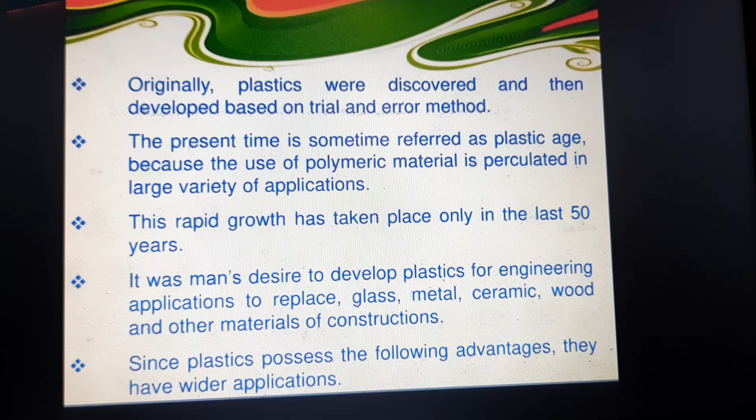Originally plastics were discovered and then developed based on the trial and error method. It was discovered by trial and error, but nowadays the whole world depends upon plastic. Second point, the present time is sometimes referred to as the plastic age because the use of polymeric material has percolated into a large variety of applications. So in all applications, plastic is present in all types of materials.

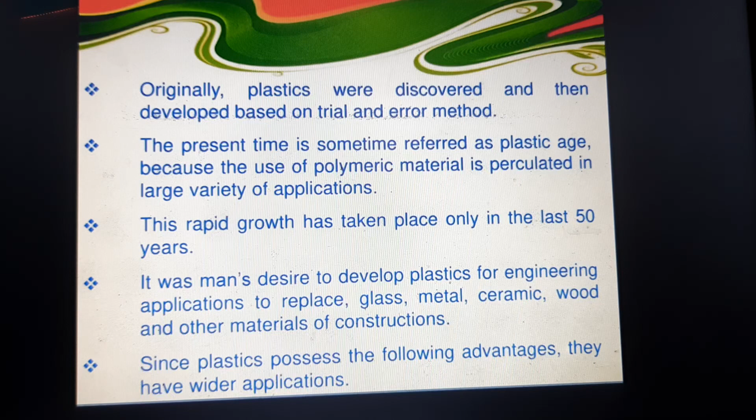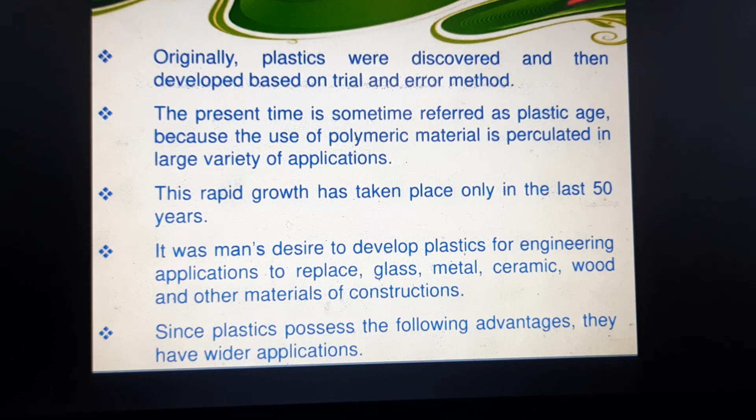Third, this rapid growth has taken place only in the last 50 years. So plastic has grown in the last 50 years in many places, all people are using it, and growth is driven by plastic. It was man's desire to develop plastics for engineering applications to replace glass, metal, ceramic, wood and other materials of construction. So plastics are desired everywhere.

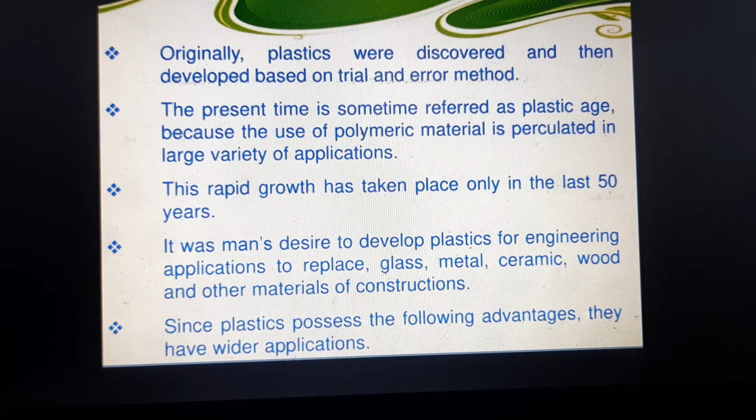Since plastics possess the following advantages, they have wider applications. Why do we like plastics? The advantages of plastic over other materials, compared with wood and metal, are why all people like plastic. That is what we discuss in this slide. Point number 1, they are light in weight. Second, they possess a low melting point.

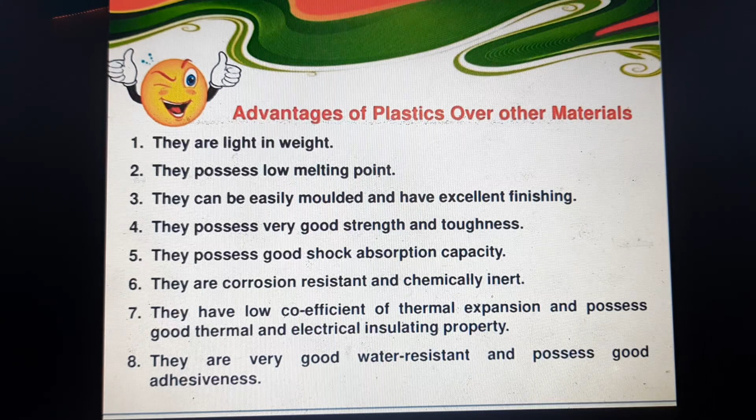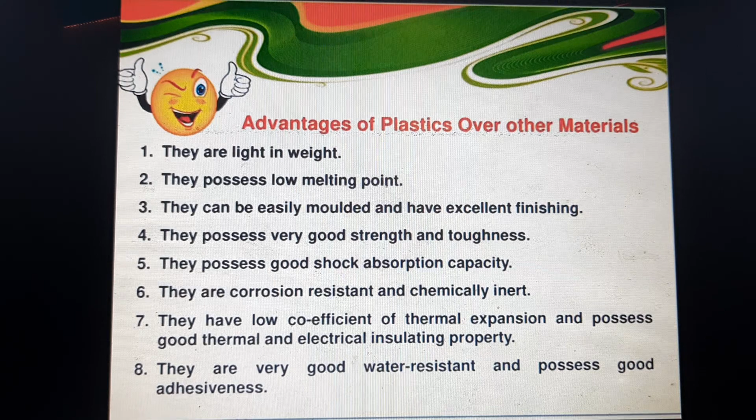Third, they can be easily molded and have excellent finishing. They possess very good strength and toughness. They possess good shock absorption capacity. They are corrosion resistant and chemically inert. They have a low coefficient of thermal expansion and possess good thermal and electrical insulating properties. They are very good water resistant and possess good adhesiveness.

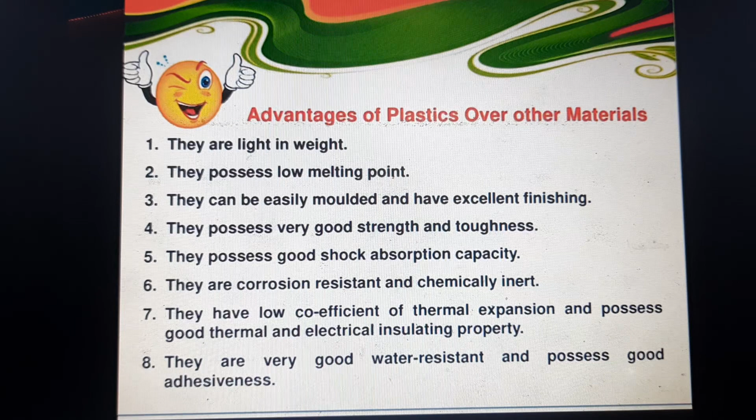So these are the properties we use in our homes. Light in weight, and the melting point is very low. At the same time, plastics give excellent finishing. In metal, the finishing is not as good. Compared with that, the plastics finishing is very good and nice. At the same time, plastics have good shock absorption capacity.

In old days, people used insulating tape as a precaution; if there was any damage in a wire, you could immediately use a plastic cover or polythene bag because plastics have good shock absorption capacity. So these are the very important advantages of plastics over other materials.

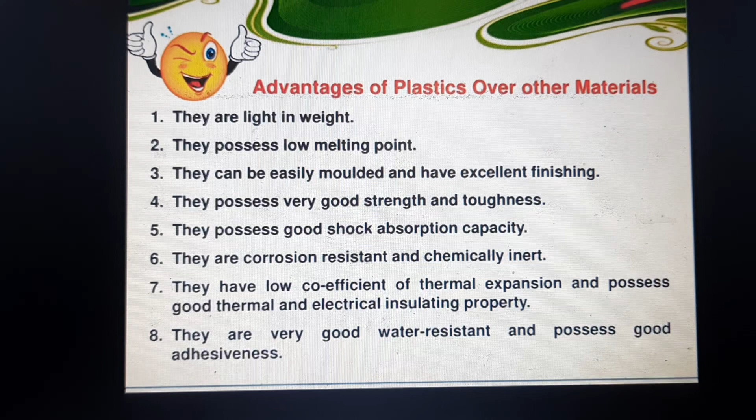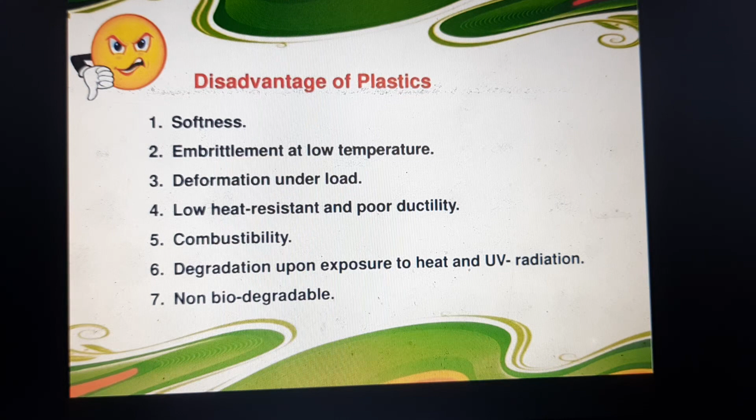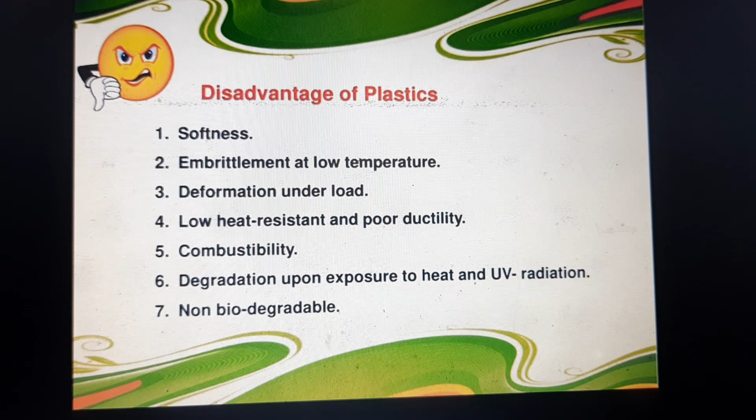Disadvantages of plastics: softness, embrittlement at low temperature, deformation under load, low heat resistance and poor ductility, combustibility, degradation upon exposure to heat and UV radiation. Seventh, non-biodegradable. These points are disadvantages of plastics. The seventh one is very important because the non-biodegradability of plastic contributes to global warming and natural disasters.

Classification of plastics. The classification of plastics is based on structure and the type of resin used for the manufacture of plastics. Plastics are classified into two main types: first, thermoplastic, second, thermosetting plastic. So how do we classify thermoplastic and thermosetting plastic? It depends upon the type of resin and structure used in the manufacturing of plastics.

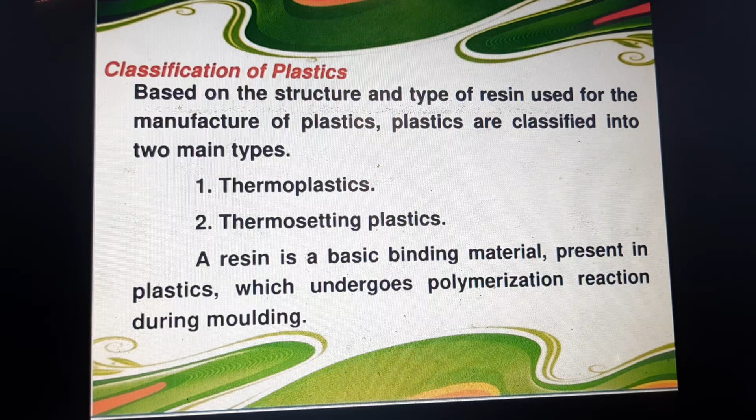So when we create a plastic, what kind of resin or what kind of structure is chosen classifies the type of plastic: thermoplastic and thermosetting plastic. Diagram. Plastics are classified into two types. First, thermoplastic, second, thermosetting plastic.

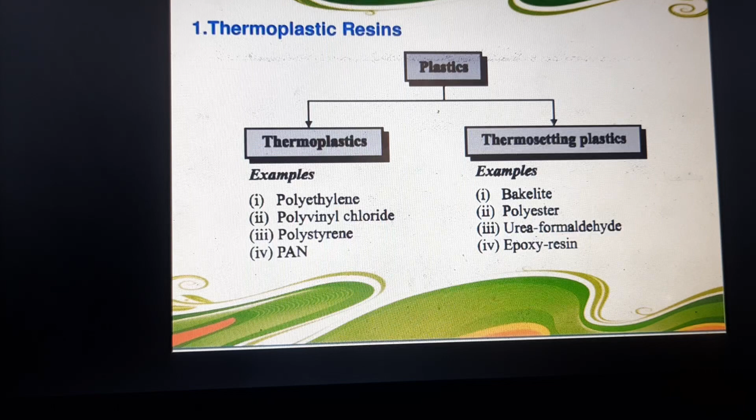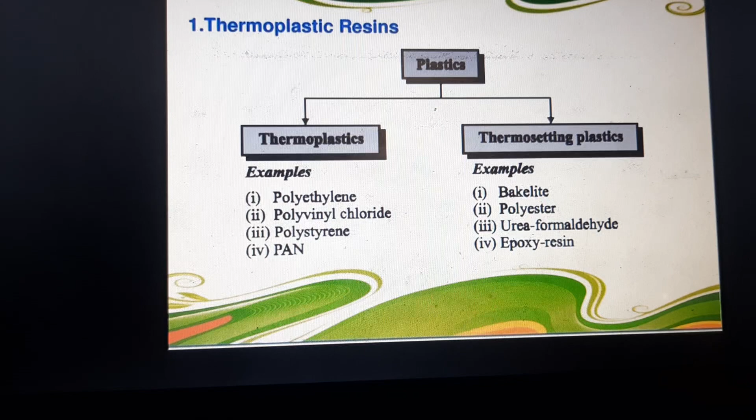Thermoplastic examples are polyethylene, polyvinyl chloride, polystyrene, and polyacrylonitrile. Thermosetting plastic examples are bakelite, polyester, urea formaldehyde, and epoxy resin. These examples are very important for 1 mark questions. So concentrate on the examples of thermoplastic and thermosetting plastics.

First we are going to discuss thermoplastic. What is thermoplastic? First point, thermoplastics are prepared by addition polymerization.

Thermoplastics are prepared by addition polymerization. The monomer is converted to polymer without elimination of small molecules. That is called addition polymerization. And second point, they are straight chain or slightly branched polymers, and various chains are held together by weak van der Waals forces of attraction.

And third one, the thermoplastics can be softened on heating and hardened on cooling. They are generally soluble in organic solvents. These 2 points are very important. The polymers in thermoplastics soften on heating and harden on cooling. So this is the main comparison of thermoplastic and thermosetting plastics.

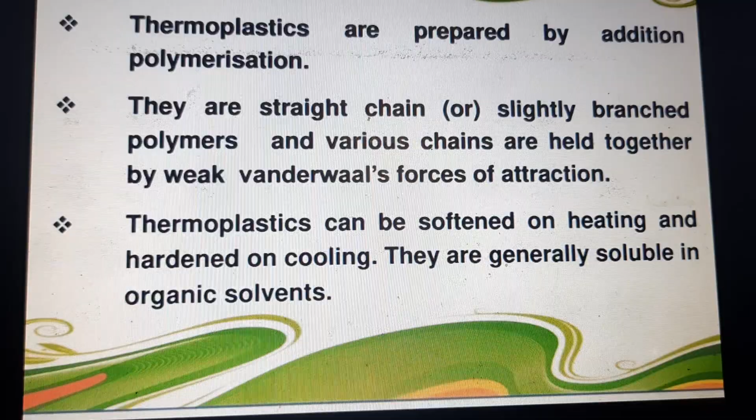This is the straight chain. At the same time, the weak van der Waals force of attraction will be present in the thermoplastic. Important point: soften on heating, hardened on cooling. Next one, they are generally soluble in organic solvent. This is a very important 1 mark question. All the thermoplastic materials are soluble in organic solvents. Examples of thermoplastic: polyethylene, polyvinyl chloride.

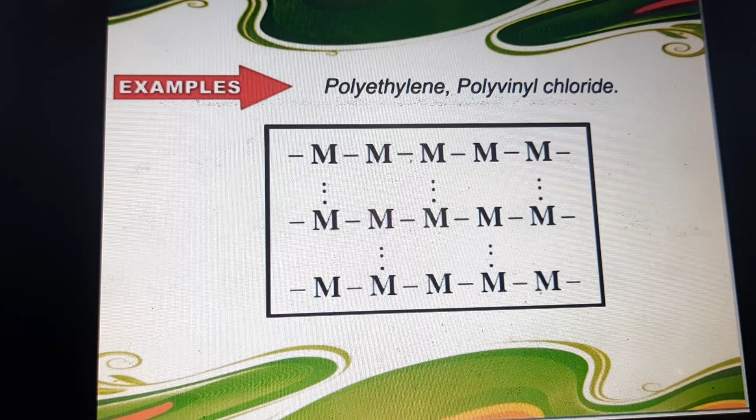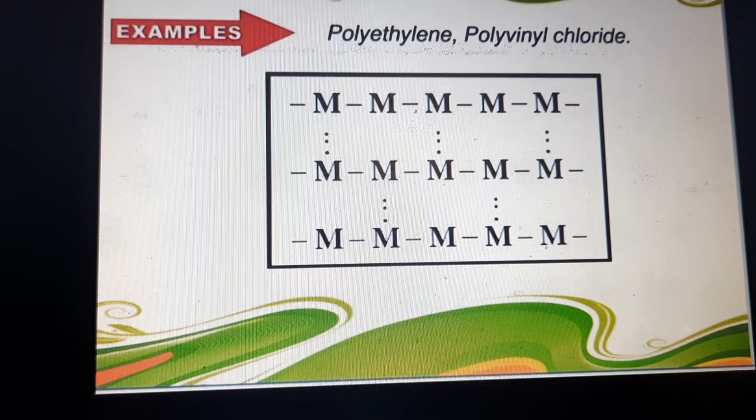This is the straight chain of thermoplastic material. The weak van der Waals force is applied between the first polymer chain, second polymer chain and third polymer chain. Only the weak van der Waals force connects all three chains. So when heated, the thermoplastic softens. In case you cool it, the plastic will be hardened. This is the main character of thermoplastic. So examples of thermoplastic are polyethylene, polyvinyl chloride.

The definition of thermosetting resins or thermosetting polymer. The thermosetting plastics are prepared by condensation polymerization. In condensation polymerization, the monomer is converted to polymer with elimination of water or small molecules. That is called condensation polymerization. So thermosetting plastics or thermosetting resins are also called condensation polymers. The various polymer chains are held together by strong covalent bonds called crosslinks.

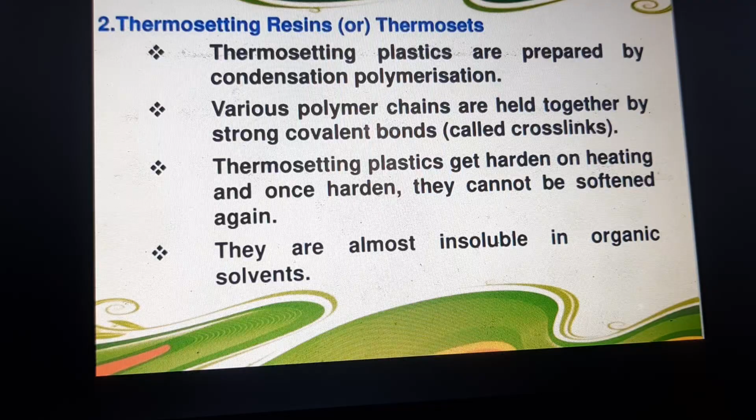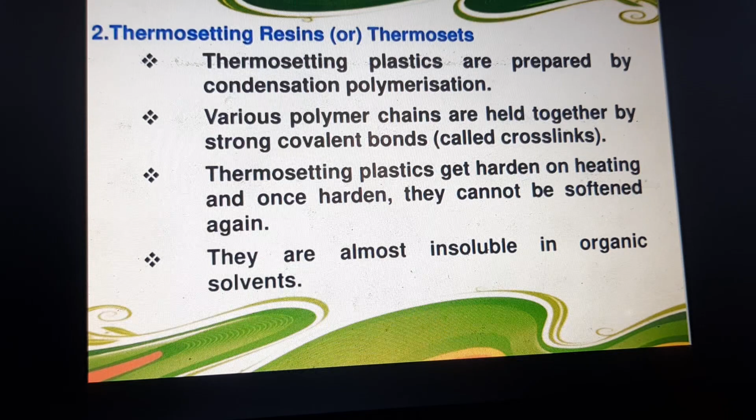The thermosetting plastics get hardened on heating, and once hardened they cannot be softened again. They are almost insoluble in organic solvent. This is also a very important point. The thermosetting plastics are hardened on heating. Once hardened they cannot be softened again. But thermoplastics soften on heating and harden on cooling. So this is the main characteristic and difference of thermosetting and thermoplastic.

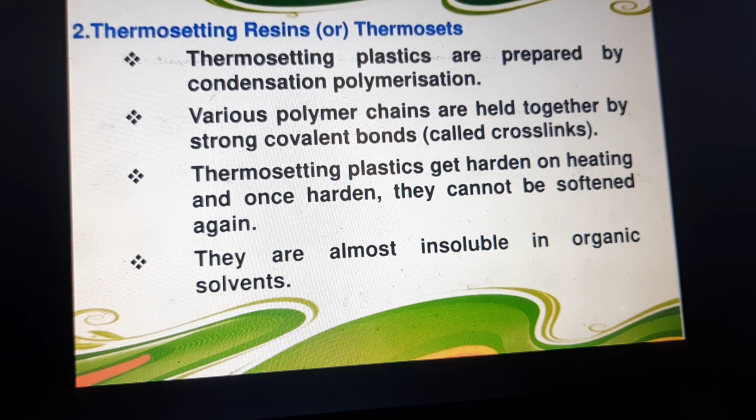Thermosetting resin will be hardened on heating. Once hardened they cannot be softened again. At the same time, the most important one mark question: thermosetting plastics or thermosetting resins are insoluble in organic solvent. This is the main deviation and difference of thermoplastic and thermosetting plastics. Examples of thermosetting plastic: bakelite and polyester.

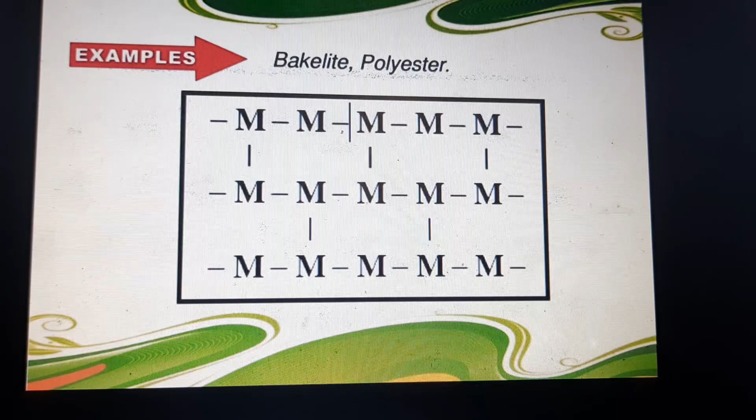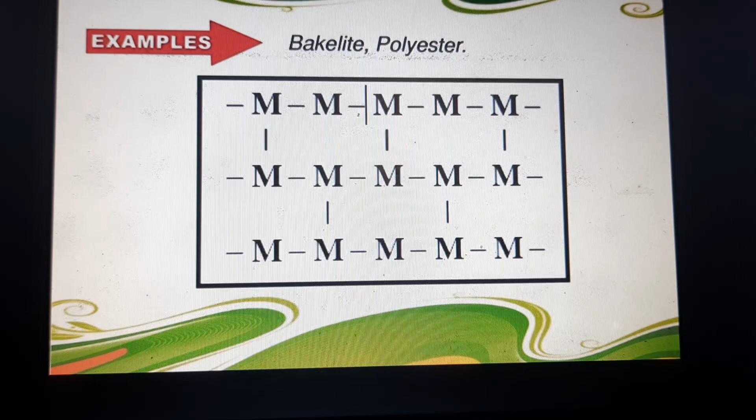Here, no weak van der Waals force is present in the polymer chain. So if you apply heat, the polymer of bakelite or polyester will be hardened. Once hardened, it is not flexible or softened in nature. So, this is the main concept. Here, all the monomer units are connected with strong covalent bonds. So if you apply any strength, the bakelite or plastic will be brittle. So, this is the example of thermosetting plastics.

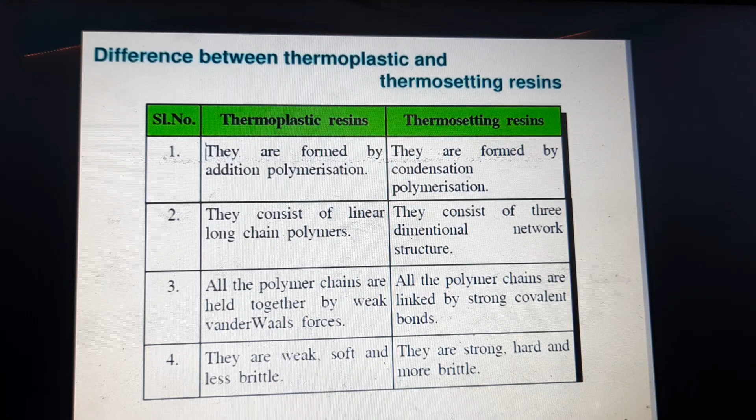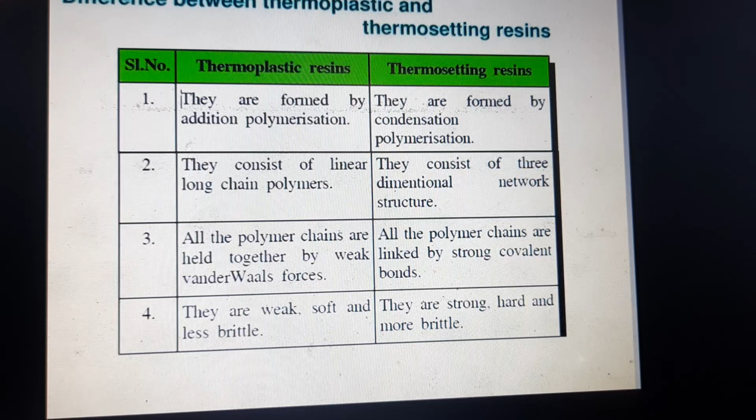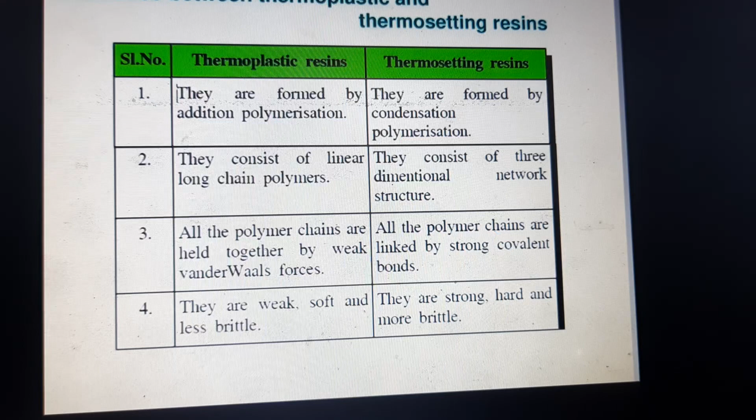An important question, the difference between thermoplastic and thermosetting plastics. Thermoplastic, the first point, thermoplastics are formed by addition polymerization. Addition polymerization means monomer converted to polymer without elimination. This is thermoplastic. Thermosetting plastics are formed by condensation polymerization. Condensation polymerization is monomer converted to polymer with elimination of water and small molecules.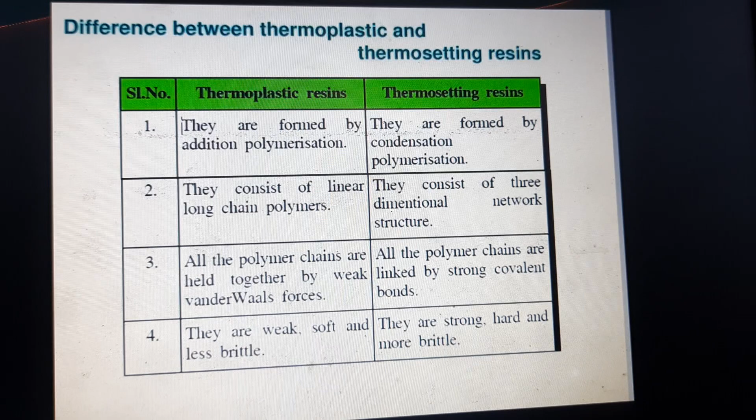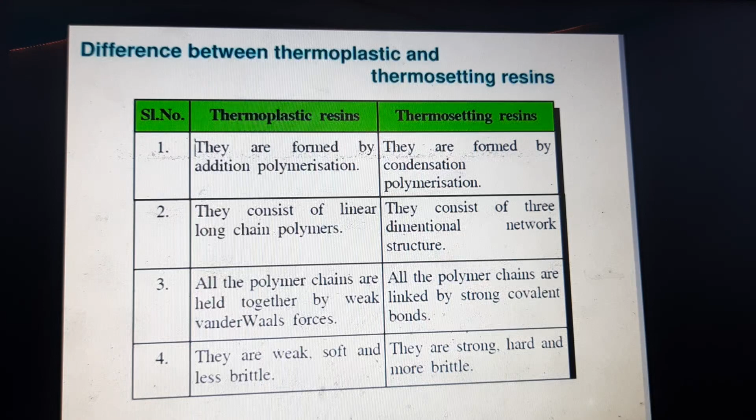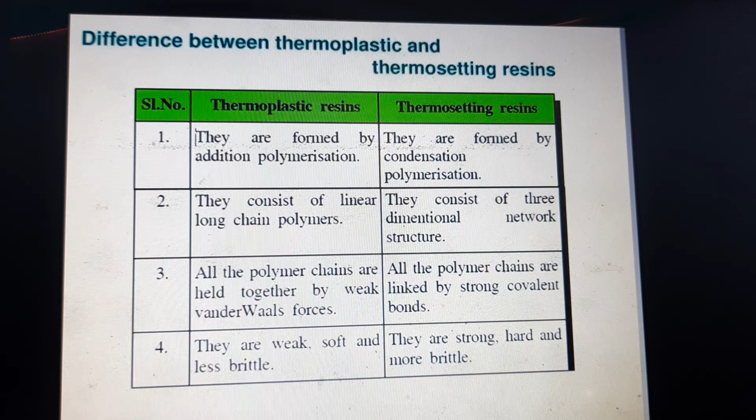Second difference, thermoplastics consist of linear long chain polymers. In thermosetting, plastics are three-dimensional or network structure. Third one, in all thermoplastic polymers the chains are held together by weak van der Waals force. In thermosetting resins, the polymer chains are linked by strong covalent bonds. So if you apply heat, the polymer material will be hardened. Once hardened, it does not return to the softened stage.

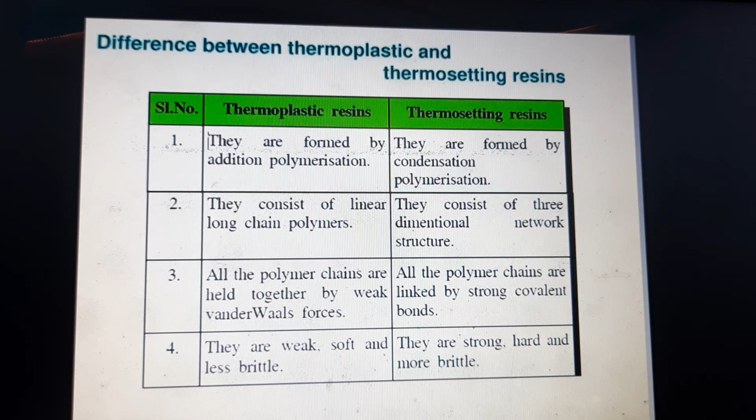But in thermoplastic, there is weak van der Waals force in the polymer chain, so if you heat it, the polymer material will be softened. Again if you cool it, the material will be hardened. This is the fourth point. Thermoplastics are weak, soft and less brittle. Thermosetting plastics are strong, hard and more brittle. Fifth point, thermoplastics are softened on heating and hardened on cooling. Thermosetting plastics do not soften on heating. Once you apply heat, thermosetting plastics are hardened.

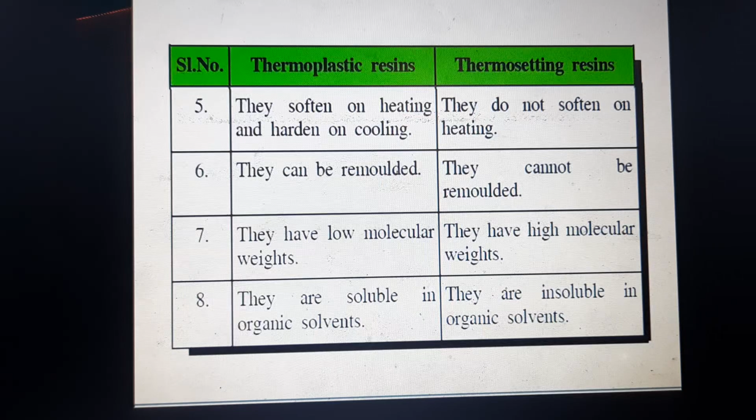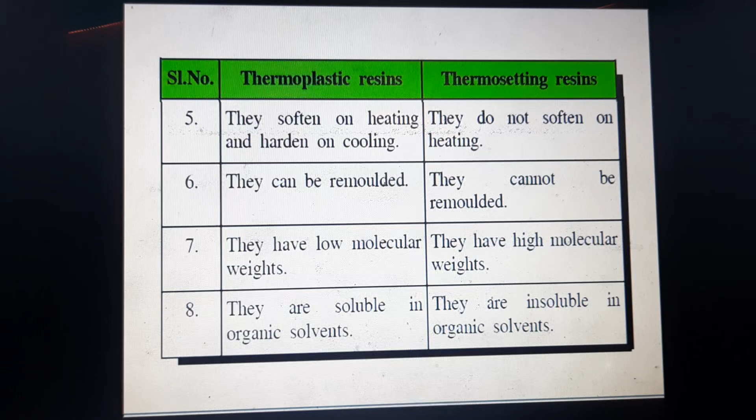Sixth one, thermoplastics can be remolded, but thermosetting plastics cannot be remolded. Seventh one, thermoplastics have low molecular weight. Thermosetting polymers have high molecular weight. Eighth one, thermoplastics are soluble in organic solvents, but thermosetting plastics are insoluble in organic solvents. This kind of difference is very important. So dear students, this is the introduction of plastics, how to classify plastics, and the difference between thermoplastic and thermosetting plastic.

Plastics have many advantages, but plastics are non-biodegradable in nature. So this affects our world. So plastics is a very important topic. So please concentrate on the whole chapter of plastics.